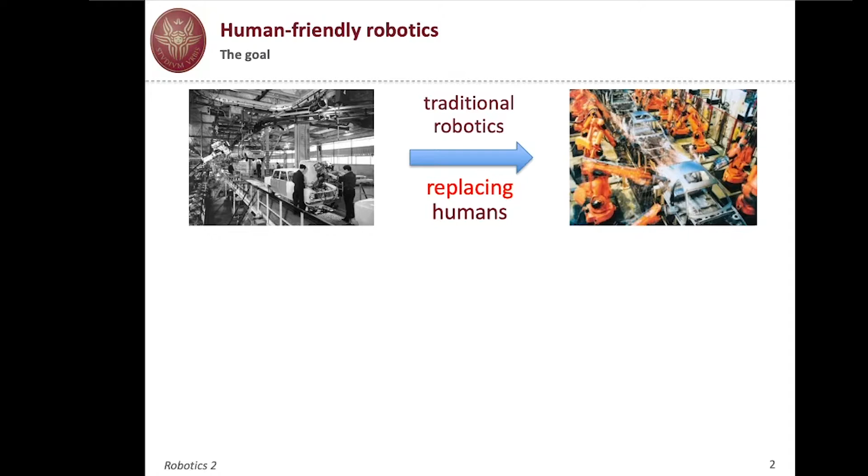I will start with a conventional point of view. The traditional robotics was one in which robots were replacing humans, typically on the factory floor. Now, for a few years, we've been talking about a new type of robotics, namely human-friendly robotics, where robots collaborate with humans, both on the factory floor, where they are called co-workers, working cooperatively with humans, or as personal robots in service applications at home, in hospitals, and so on. This means there is a planned proximity between humans and robots, both physical and cognitive, and we have to consider a number of things so that this may happen in a safe and consistent way.

The results I'm presenting are mostly research-oriented, developed over a number of years through European projects, first PHRIENDS, as I mentioned, and mainly the Saphari project, which we coordinated at Sapienza University of Rome between 2011 and 2015. As you can see from the partners and main topics, we tried to cover all aspects important in the interaction, in particular the physical interaction between humans and robots, covering the paramount aspect of safety, but also an intuitive way of communicating with robots.

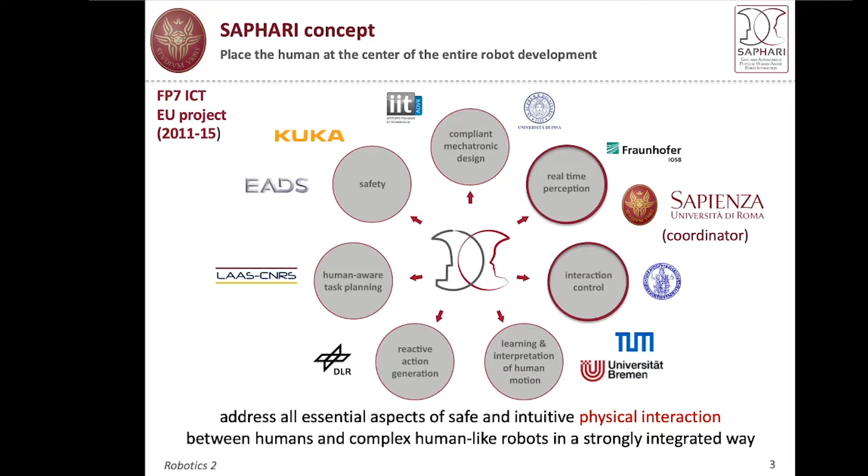In this lecture, I will cover essentially two topics: real-time perception, namely the use of sensors for monitoring the workspace in which the robot operates and understanding relative distance with other agents, particularly humans; and interaction control, in particular physical interaction control, the possibility of controlling and exchanging forces in a safe way between the robot and the human.

So in our plan of lecture, we have seen a first basic block of this hierarchy of behavior, and in all cases we formulate control problems which are strictly related to safety.

We have seen that we were able, without the use of external sensing, using only proprioceptive devices on board the robot, to detect and even isolate collisions, so unintended contacts between the human and the robot. We also saw a number of reactions mainly intended to abandon the area of contact, possibly continuing the robotic task in operation if this is safe enough.

Now, the next step, or if you wish, the previous step, would be to avoid this type of collision or unintended contact, which means we now need sensors for monitoring the workspace continuously and letting the robot react to vicinity, not just contact, which is the last moment of this interaction. So, avoiding collision while doing the task, or abandoning the task for a while and then resuming it as soon as the danger has passed.

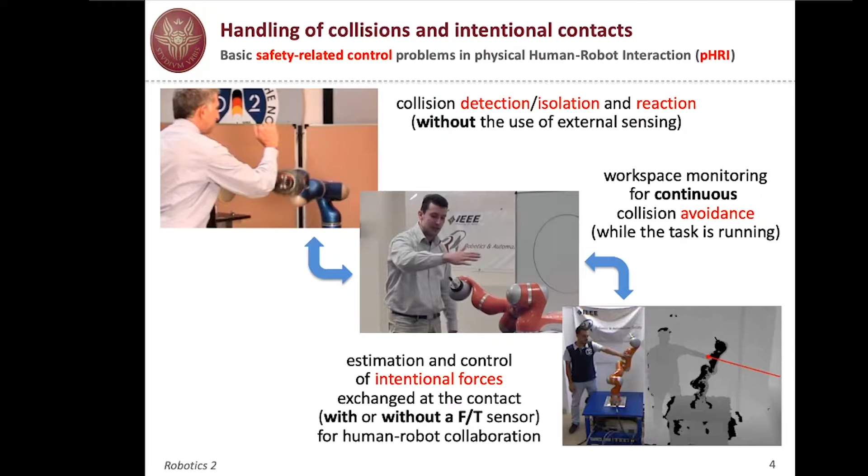So we have to estimate the forces at the contact. These are intentional forces being exchanged, and we may wish to use a force-torque sensor, or even proceed like in the first problem we saw, without using any other dedicated sensor. Of course, we may use whatever we developed for monitoring the workspace, so proximity sensing, together with signals generated in response to a collision, to detect a collision. We combine these two types of information in order to achieve the goal of physical human-robot collaboration.

A few years ago, we set up a control architecture that tried to capture all the robot behaviors relevant for this problem in a consistent way. The solution goes through an integrated design and combined use of several components, from hardware to software: soft mechanics meaning compliant, lightweight arms, actuation which may also be compliant and variable according to the task the robot does with the human, extensive use of proprioceptive and exteroceptive sensing, communication between robot and human or robot and robot, and everything orchestrated by control algorithms.

We decided that three levels were satisfactory to address the problem. The inner, or lower level, is safety. The second we call coexistence. And finally, collaboration. We will see now in detail each of these levels, what they are devoted to, and how they interact.

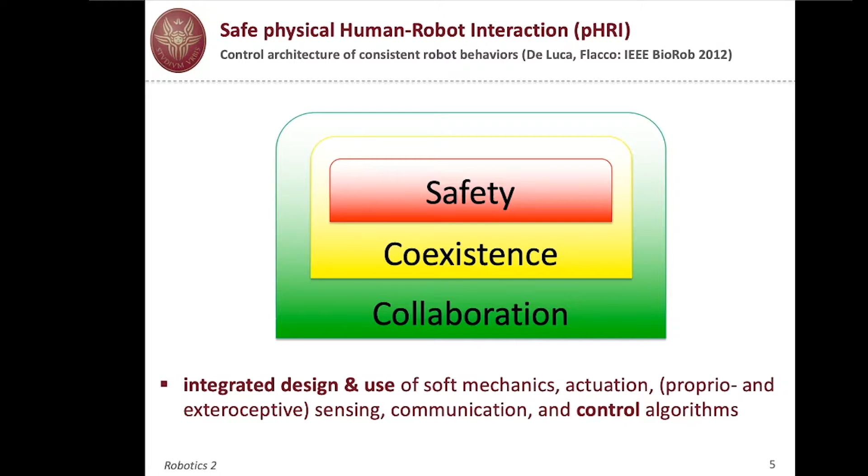First of all, the always active level is the safety level. This is the most important feature a robot should possess to work together with humans. The classical solution adopted on the factory floor was using cages, protecting the human from any movement and operation of the robot. So when the robot is in action, the human is not there. When the human is there for programming or maintaining the system, the robot is switched off. These are not appropriate solutions for physical human-robot interaction as we foresee it, so safety should be guaranteed in a different way.

One way is to use a collision detection method which is reliable, practical, and on board, like we have seen. Together with this, the design of lightweight arms, compliance at robot joints, and probably also some software parallel architecture that guarantees continuous operation even in the presence of failure. All this goes into the domain of safety.

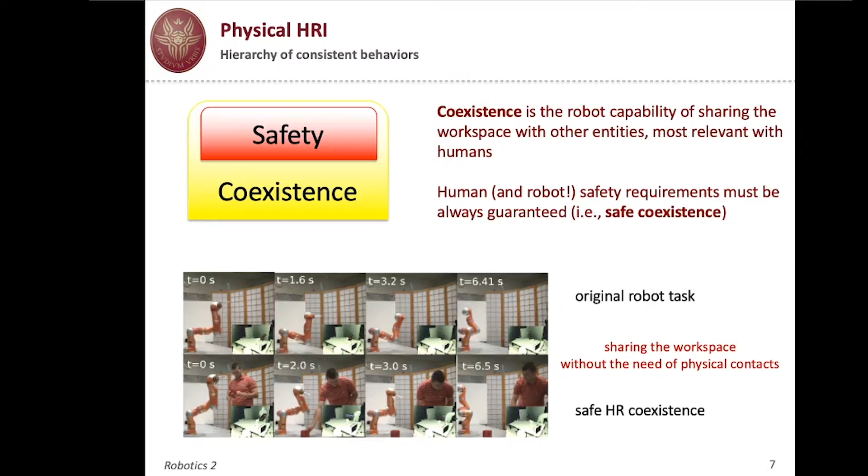This is the most complex task: collaboration. It's at the top of this hierarchy, and of course collaborating should be consistent with the other behaviors. Collaborating means having the robot and the human do typically complex tasks with interaction and coordination.

There could be contactless collaboration and physical collaboration. These two modalities are not mutually exclusive. By contactless, we mean, for instance, communication by gesture or voice command, or both, or even visual coordination - the robot following the human as the human does something, or the human showing something to the robot, and the robot replicating this type of behavior. There is no contact involved, but there is coordinated motion, so we call this also collaboration.

But in fact, we were more interested, particularly in the Saphari project, in physical collaboration, which involves intentional contact. So we should not avoid contact - we should recognize that human and robot should enter into contact and exchange forces, and of course this exchange of forces should be controlled.

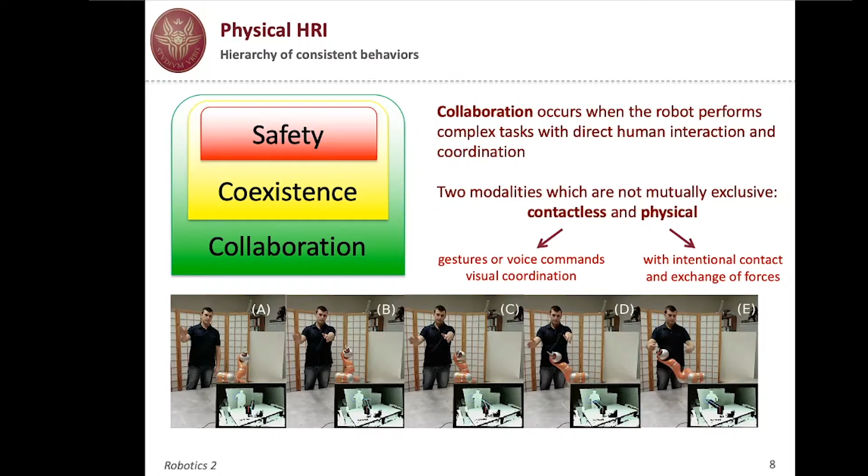Indeed, collaborative operations are also normed by standard. In particular, the standard ISO 10218, part 1, which concerns the single robot, and part 2, which concerns the robotic system as a whole, lately refined by a technical specification, the notation with the colon and the year. The year stands for the year of publication of the standard or of the technical specification, TS, which is not yet a standard. So the last one is of 2016, the 15066.

So in this context, there have been some effort in specifying what should be done, what can be done, what cannot be done, and classify the level of interaction, which are generically defined as collaborative operation, even if there's no physical collaboration in the sense that we have just mentioned.

So the simplest level, level 1, is the so-called safety-rated monitored stop. The human is entering in the vicinity of the robot, and the robot, through its external sensors - camera, lasers, proximity sensor, time of flight, whatever you name it - recognizes this proximity and stops. Now it doesn't stop in a catastrophic way, because this type of stop is already programmed so that the robot may resume its operation from that moment. It's not an alarm stop where you push the red button and then you have to restart the system.

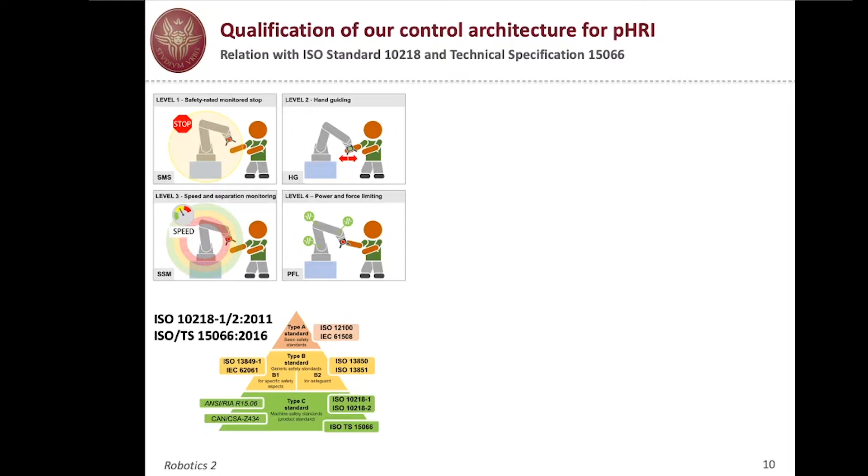If you look more carefully, on the right-hand side we have our 3 layers, and I single out some specific tasks assigned to each level. To safety, we mentioned collision detection and reaction. To coexistence, sharing the workspace, monitoring the workspace with extra sensors for the purpose of collision avoidance, and of course collaboration, coordinated motion and action with or without contact.

In the table on top, the brown table, you see that for each level there are specifications in the ISO standard about speed, about separation distance, about maximum torques, about controls that should be available to the operator, and how to reduce risk through analysis, assessment, and mitigation by special action.

You see that I've put some ellipses that relate the various levels to our architecture. Indeed, safety goes across all these 4 levels of collaboration. Our collaboration, physical or with coordination, is related to hand guidance, so level 2, or to power and force limitation, which is level 4, while coexistence involves level 1 and 3 - stopping or slowing down and possibly stopping, but still monitoring relative distance between the human and the robot. So we fit into this type of standard, although we developed our control methodologies rather independently from that.

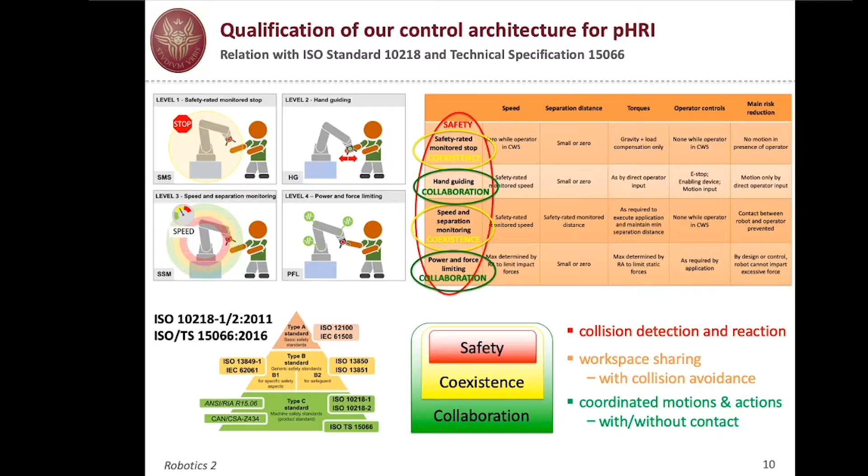Okay, so dealing with collision detection and isolation, we have defined a collision event pipeline. If we consider the problem of handling collision, we have this continuous cycle going on. We plan motion to prevent collisions, but because of the highly dynamic and unpredictable environment, because of the presence of humans, this plan may even fail. So we control the motion of the robot in real time to avoid contact, to escape from possible collisions.

If this is not achieved for a number of reasons, then we should detect that we have had a collision, isolate the link that collided, and possibly distinguish if this is a severe collision or not. Maybe if it's a soft collision, it could be an intentional contact that the human is searching, using the contact to provide some command, for instance the intention to collaborate. In any case, once we have classified the type of contact or collision, we react or replan motion - for instance, if the robot switches mode and is ready to collaborate from now on. This is a continuous cycle; you can restart, plan to prevent, and so on.

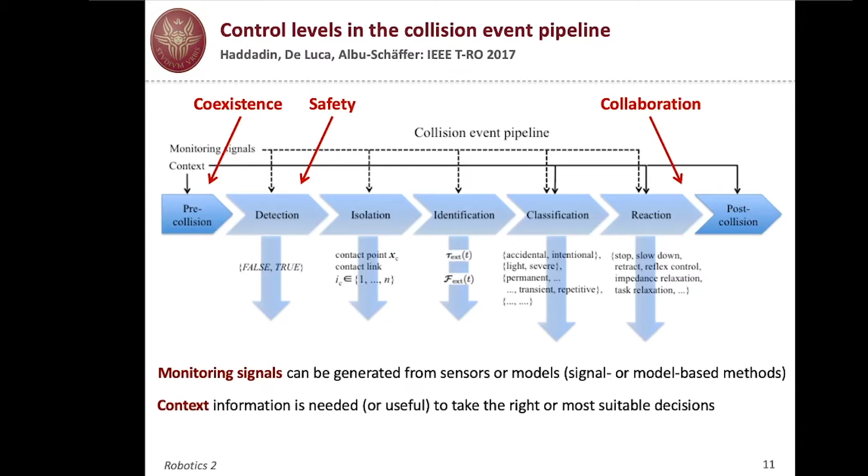Now, just to recall the safety part that we developed from the point of view of software: collision detection and reaction based on residuals, monitoring the total energy or the generalized momentum. This was mainly work done within the previous project, the PHRIENDS project, also financed by the European Community.

You can see that there are possible reactions, the reflex reaction, generating torques which amplify the residual from the collision so that the robot flies away from the area. The admittance mode was commanding the motion in the joint space proportionally to the amplitude of the residual, and the residual goes to zero as soon as the contact is lost. So you see that the reaction in admittance mode is more stiff in a sense, as opposed to the smooth behavior with the reflex torque.

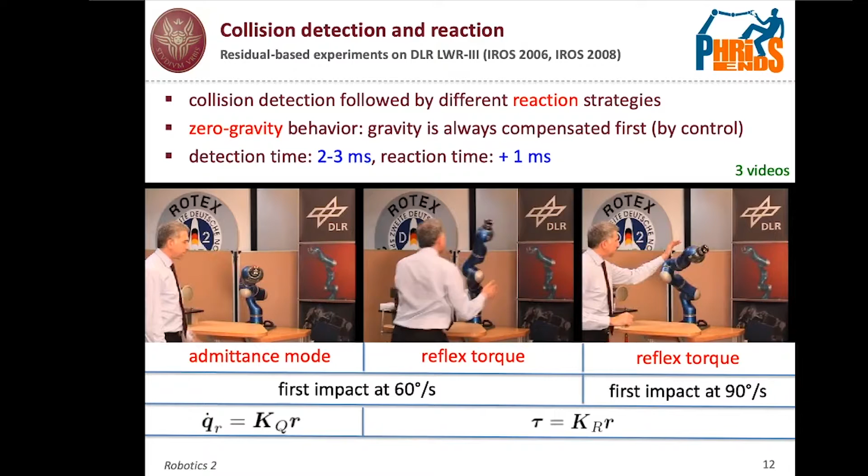Okay, so this is done in a sense. This belongs to the layer of safety. So from now on, we will move to the second layer and then the third layer of collaboration. My presentation will develop the two layers one after the other.

At this point, I would like to show you a couple of videos that tell us the story. The early days, this is an informational video developed by the National Institute for Occupational Safety and Health of the USA in 1989. And then one video coming about 23 years later, a commercial video by ABB. It's just an extract from a longer video which presents some hardware, the electronic position switch that allows the robot to stop when something goes wrong, and also the software, the Safe Move software, which implements some of the ideas presented also in the safety standard ISO 10218.

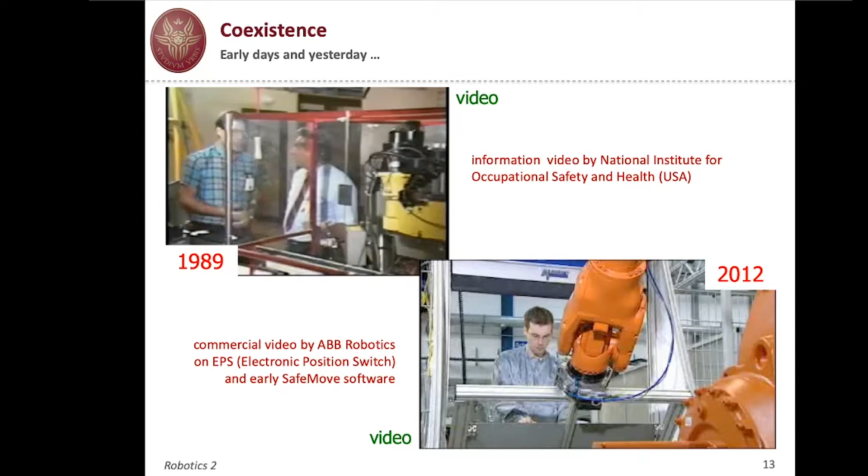Robots have brought about more productive manufacturing lines and greater quality assurance. Their use has saved people from having to work in hot, toxic, or otherwise dangerous environments. Automated production lines using robots are chalking up an admirable safety record. However, industrial robots have injured people, and injuries may occur more frequently as the number of working robots increases. In at least one case in 1984, a worker was killed. The victim entered the working range of the robot, presumably to clean up scrap metal that had accumulated on the floor. The work cell control systems did not sense his presence, and as a result, the worker was pinned between the back end of the robot and a steel safety pole. His heart stopped. No matter how automated a manufacturing line is, there are sure to be workers around who must be protected: line operators, maintenance workers, programmers, managers and visitors. Robots have weak sensing capabilities, so they can't be relied upon to always react in a safe way when these workers approach. Safeguarding robots is more complex than safeguarding other types of machines. Their range of movement is much greater than other machines. Machine guards around belts, other moving parts, and points of operation are small in comparison to robotic work cells that often encompass several cubic yards on the plant floor. Robot guarding has to be flexible too, to adapt to the variety of tasks a single robot may perform.

As you have heard, there was a big concern about the potential for injuries and incidents on the factory floor. One reason for that was that the robots had low sensing capabilities. This has, of course, dramatically changed since then, but it's important to understand where we were coming from.

Now, the next video, as I said, is 23 years later, and we'll show some commercial products by ABB Robotics.

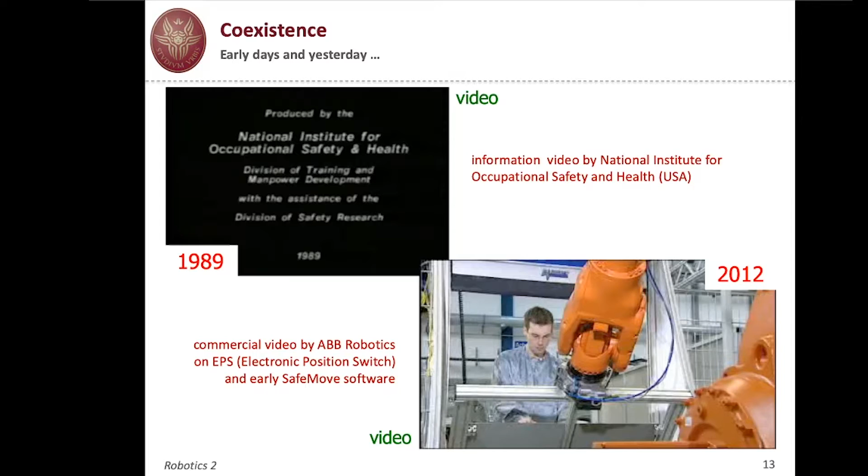With the function EPS, electronic position switch, the conventional limit switches used to restrict the working range of the robot are fully replaced by a software function. If, for example, due to a programming error, the robot attempts to access a forbidden zone, it will be switched off by the safety controller.

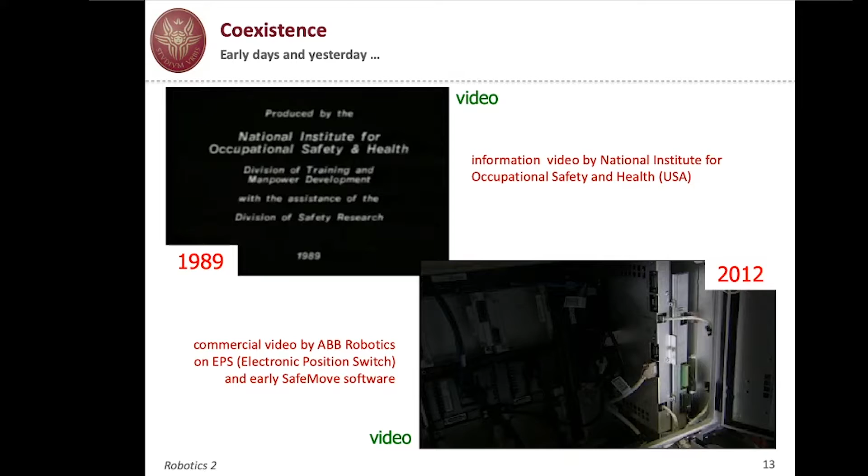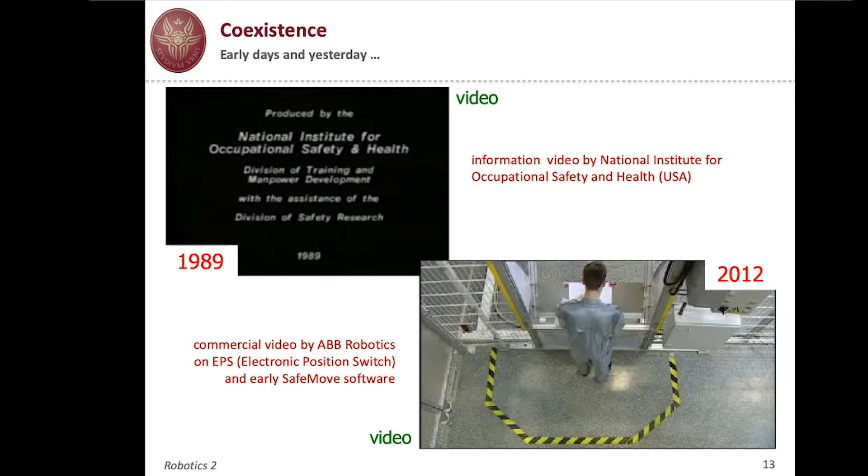The interaction between a worker and a robot, such as for manually loading a gripper with a workpiece, becomes possible with the Safe Move function. With Safe Move, the safety controller supervises the safe standstill of the robot during the time the worker is within the hazardous zone.

Furthermore, Safe Move allows limiting the robot movement to predefined zones in space in order to enable safe coexistence of human and robot. It also allows restricting the traveling velocity of the robot to a preset value.

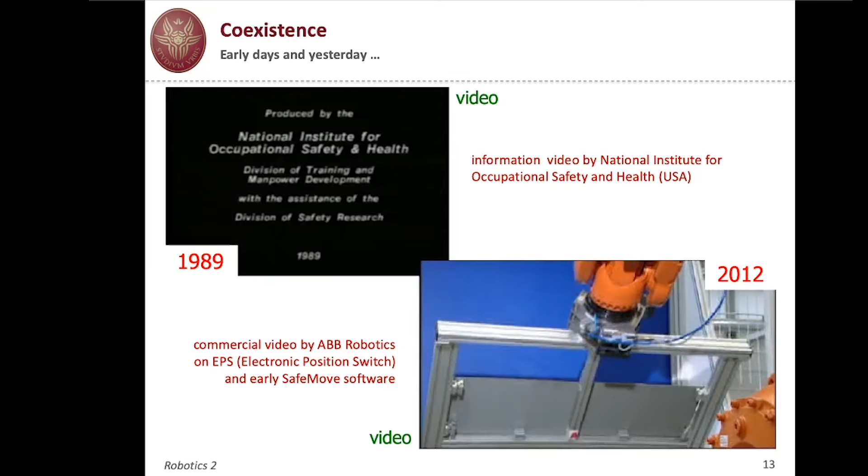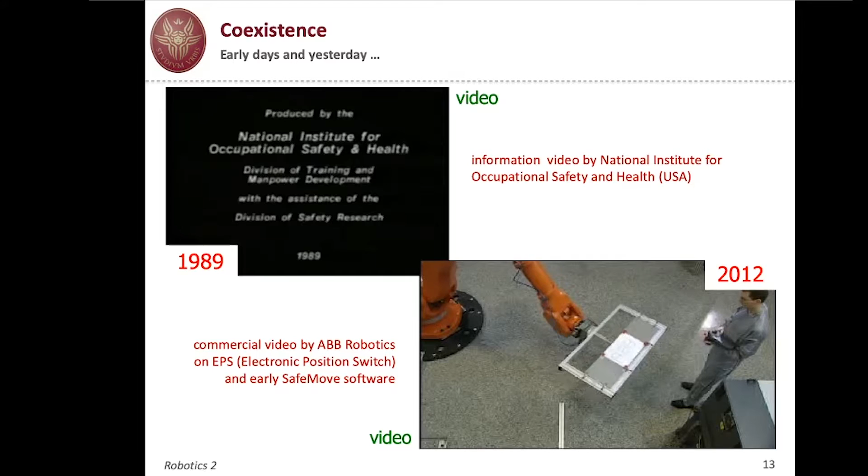To enable humans and robots to optimally complement one another while carrying out manufacturing tasks together, it is necessary that the position of the worker is spatially detected in a safe manner at all times. In principle, this can be achieved, for example, through camera systems which constantly monitor the workspace of the robot and the position of the worker, and continuously transmit this information to the control system.

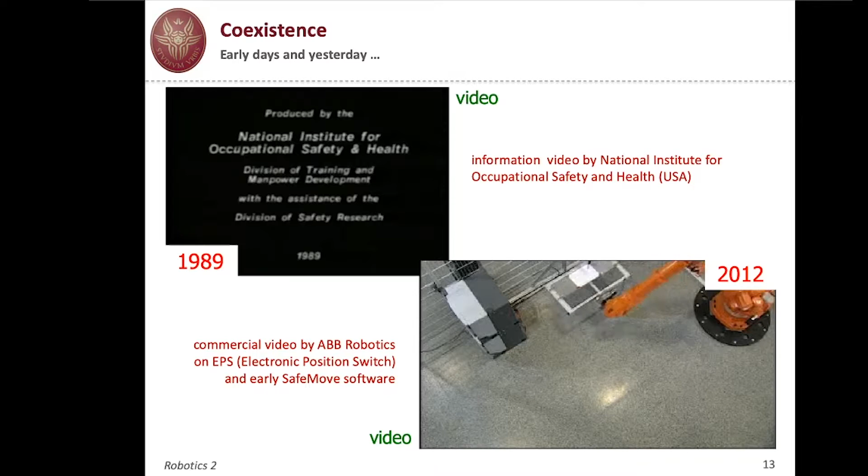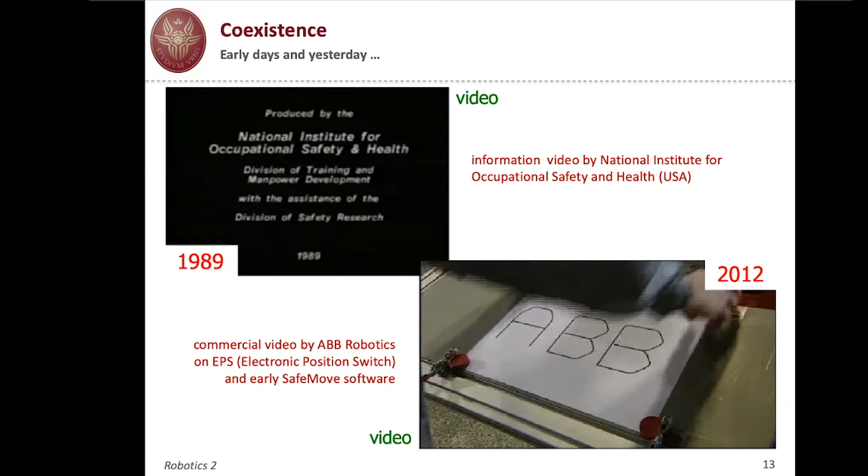If robot and human approach one another, the control system can first reduce the velocity of the robot until it finally switches the robot off completely, in case the distance between worker and robot falls below a preset distance. This method allows safe implementation of new semi-automated manufacturing strategies that were not possible up to now.

So, as you have heard, about 8 years ago, in the manufacturing area of ABB, they started developing this SafeMove software. Things have progressed since then, but you may have recognized the speaker mentioned a couple of aspects.

So, slowing down motion, stopping the motion—everything is controlled by monitoring of the workspace. In particular, they were using a laser scanner in this context. You saw a laser scanner in front of the window, which was open when the human brought in a part and wrote the logo of ABB, and on a table supported by the robot. In all other operations, there is always a camera, laser, or proximity sensor monitoring distances.

So things have developed, and in fact, in 2016, ABB issued SafeMove2, which is certified. This is a demo from an exposition in Singapore in November 2016, which is simpler than the one we've seen before. There is no audio, so I can run it right now. This is, I would say, today's operation.

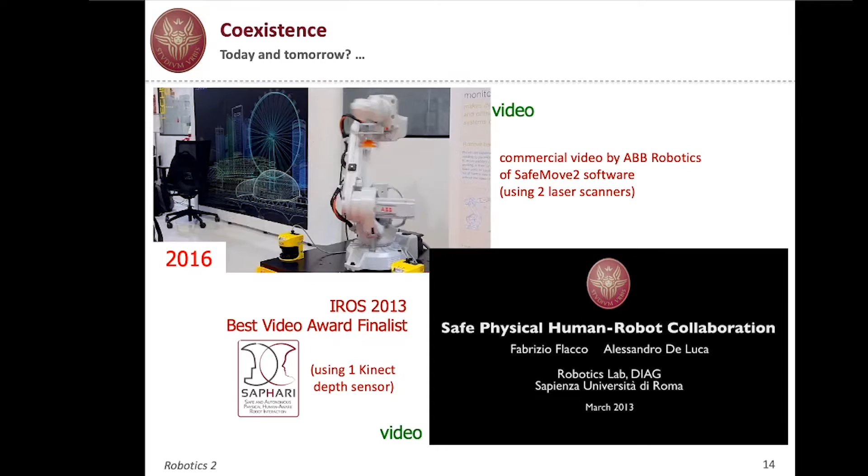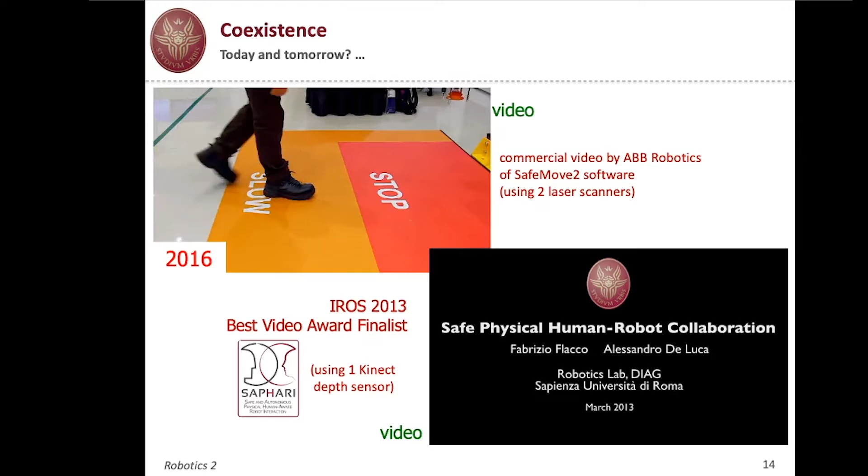So this is an ABB robot, it's white, not orange. This, just for representation, shows the areas being monitored. You see at the base of the robot there are two laser scanners, the yellow boxes, right and left. When the human enters the slow area, it reduces its own motion. When it enters the stop area, for instance to inspect the end effector content, the robot stops completely. Then it restarts because you're in the slow area, and when you're out of this, it's completely off.

Okay, so around the same time, in SAPHARI and previously in PHRIENDS, we developed our architecture. We have here a summarizing video, about 3 minutes long, again with audio. I will stay quiet for these 3 minutes, which shows our concept.

You will see that our concept, especially for testing distances between the human and the robot, is much more flexible. It allows the human to get much closer, still under safety conditions, to the robot. There's a difference because here we use a lightweight robot by KUKA, not an industrial one, but apart from that, the operating conditions are quite similar.

In the video by ABB, they were using two laser scanners. Here we are using just one Kinect depth sensor, which is, by the way, a very cheap one. But our solution has not yet been certified by the institutions devoted to this, so it cannot be moved directly into an industrial setting without that certification. This may be done eventually—it's not something we're particularly interested in doing ourselves, but there are some transfer activities of this type. So, the next video is 'Safe Physical Human Robot Collaboration,' and it dates from 2013.

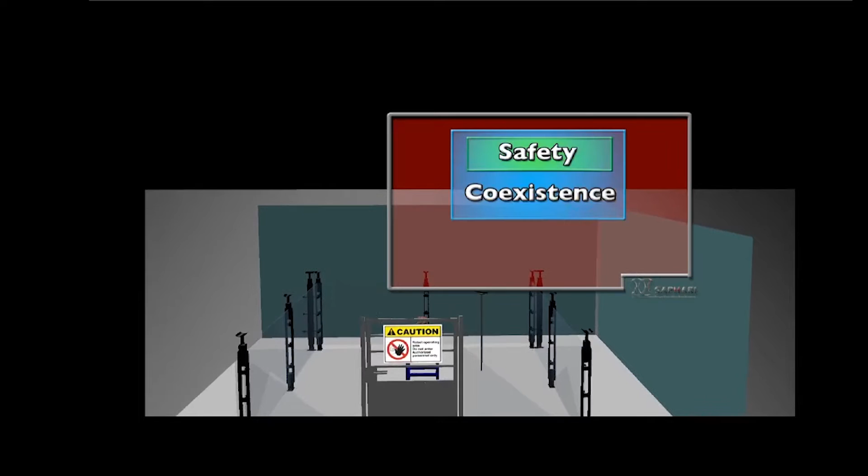Safety is the most important feature for robots working close to humans. Coexistence is the robot capability of sharing its workspace with other entities. Collaboration occurs when the robot performs a complex task with direct human interaction and coordination.

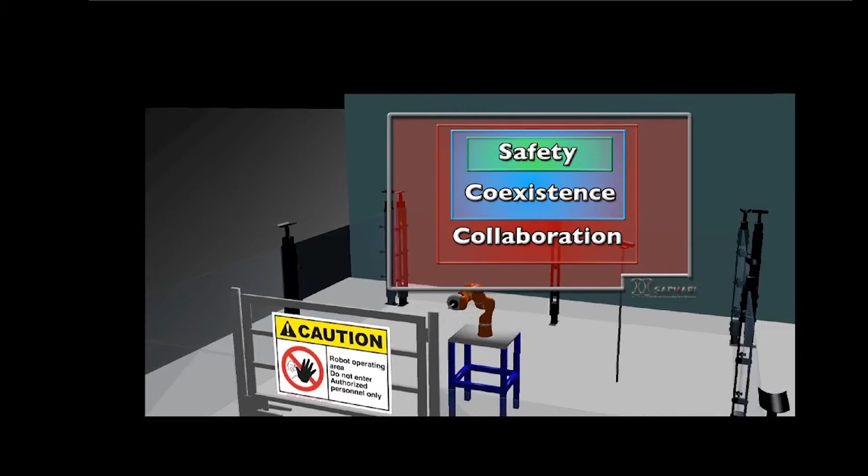Safety is guaranteed by a collision avoidance method based on a depth sensor, the Kinect. Points of interest on the robot are projected in the depth image, where robot-to-obstacle distances are computed in a fast way, taking into account also obstacle occlusions. Collision avoidance is performed in real time.

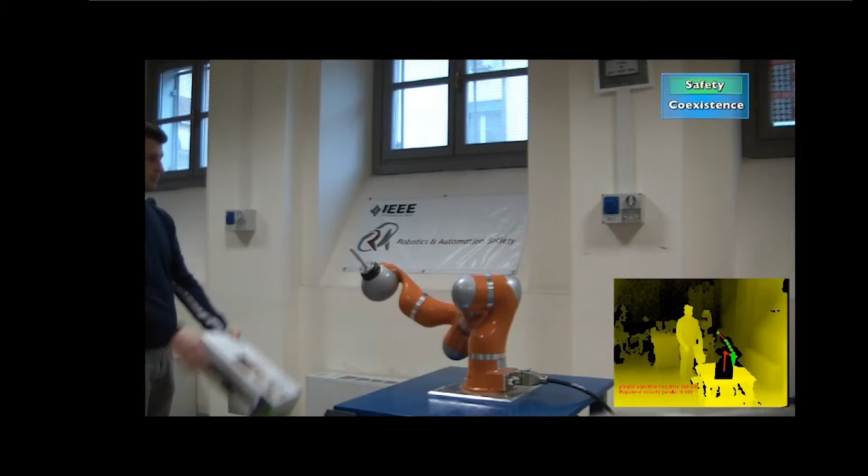Besides tracking the human pose, also static or moving obstacles are detected, tracked, and avoided. Multiple obstacles are avoided as well. Except for the end effector, all other robot points of interest will treat obstacles as geometric constraints in Cartesian space.

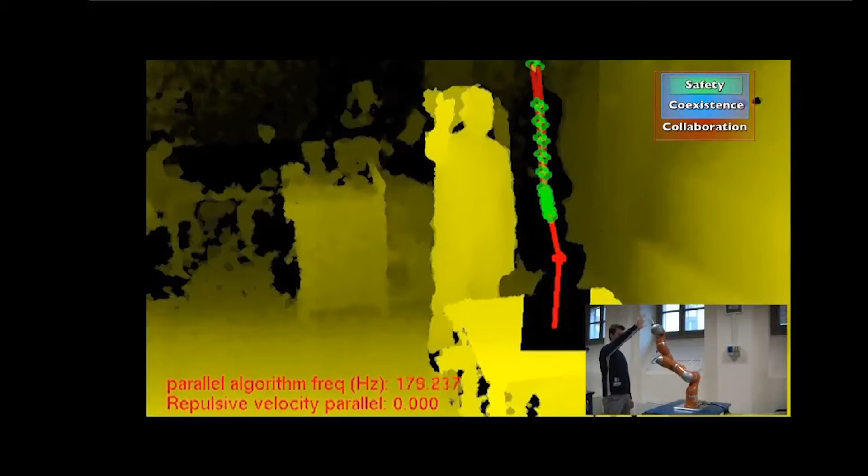A collaboration phase is started by the user with a simple gesture. Contact points are localized using the depth sensor. This geometric information is collected together with the joint torques resulting from the contact, as obtained by our residual-based estimator. Combining this data allows an estimation of the exchanged forces at the contact point, those used by the human for guiding the robot.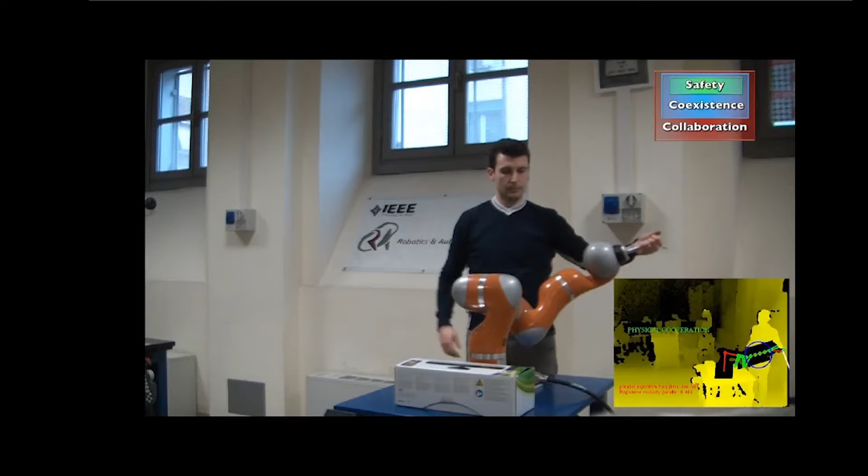The user requests to end the collaboration phase by pushing on the robot end effector. Safe coexistence is guaranteed: only the designated collaborating hand is allowed to get in contact with the robot end effector. All other entities are still considered as obstacles.

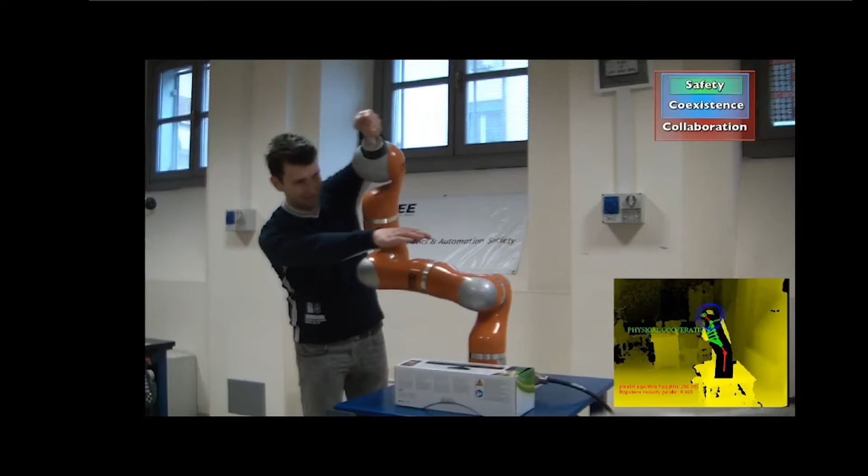Robots and humans for a safe physical collaboration. More results on safe physical collaboration tasks are underway within the Saphari project. Stay tuned.

Okay, so apart from the music, which is horrible but was free, you have seen all the development that we have made, in particular by measuring distances between the robot and the human. We use a depth space approach, and now I will show you how this works, which allows us to get very close to the human, in fact, between the human and the robot, before stopping the robot or moving it away.

The second part instead is more devoted to collaboration. This was our first attempt to do collaboration only at the end effector level. And you have seen what I called consistency between collaboration and coexistence.

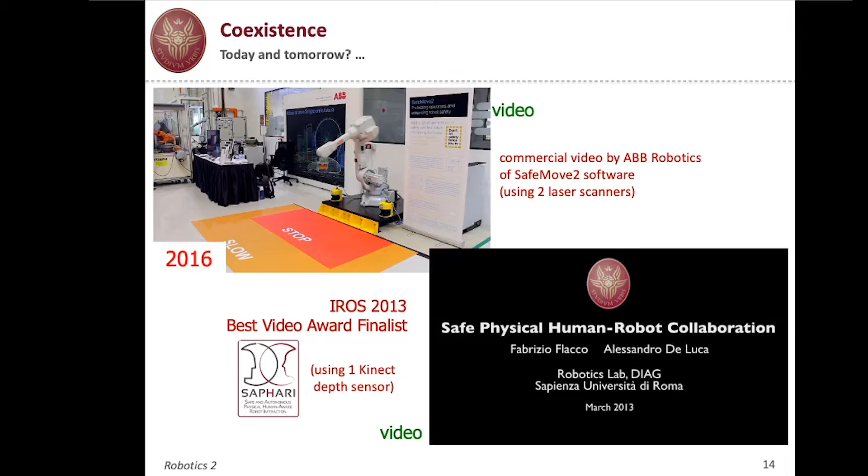At some point, Fabrizio Flacco, the person in the video, is holding the end effector and moving it against his other arm. Because collaboration was in action, the robot was following the human hand at the end effector level. But since coexistence is more important for the other part, trying to bring the robot against his other arm made the robot very stiff, so that Fabrizio could not really bring it into contact. So at this stage, you have a safe collaboration or a coexisting collaboration, because the two levels have interacted in this way. Okay, so let's move on and consider the problem of collision avoidance.

Of course, we need to have an exteroceptive sensor monitoring the workspace, and there could be a large variety of sensors. In fact, for instance, laser scanners were used mostly for navigation in robotics. Now the main target is to provide information on human-to-robot distances in safety cells. You can have stereo vision, single camera, multiple cameras, Kinect depth sensors.

Presence sensor, or structured light. So you can combine a variety of sensors, also of different cost indeed.

One main problem is where to put the sensor around the cell. You should try to minimize areas which are not covered by any sensor. You don't want to use a large number of them, so you have an optimization problem, which takes into account also the probability that the human will stay in some area around the robot. For instance, if most of the time the human will be in front of the robot and not on its back, then it is clear that our sensor will be more pointing to this area rather than the other.

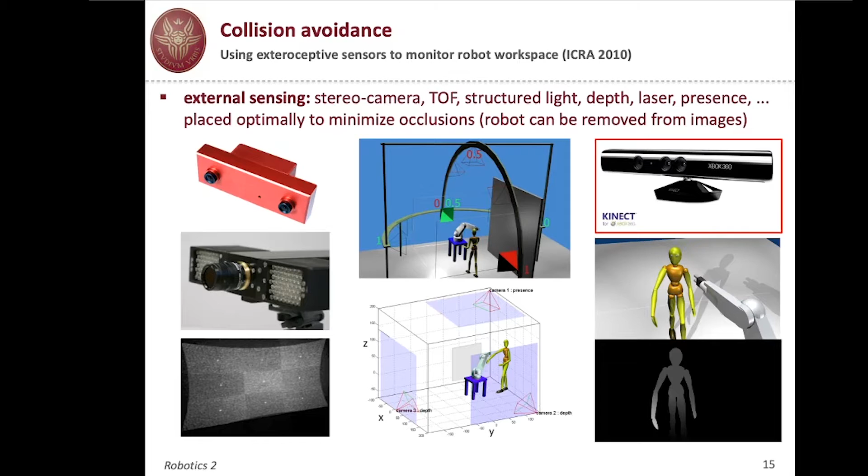So we decided to use the depth information. Depth information is coming from so-called RGBD sensors, so cameras which are equipped also with an extra laser information, which allows us to reconstruct the depth and associate to each pixel of the image also a depth of the object being seen. So in this typical image in yellow and black, the lighter the color of a pixel, the closer is the object. Objects which are far away are pretty much dark.

Once you have collected this image, how do you use it to understand relative distances between a moving robot and objects in the environment, which may be either static or moving like a human? There have been over the years a number of approaches working in the configuration space of the robot, which is the typical motion planning space that is being used. We just need to compute distance very quick, very fast, and very reliable.

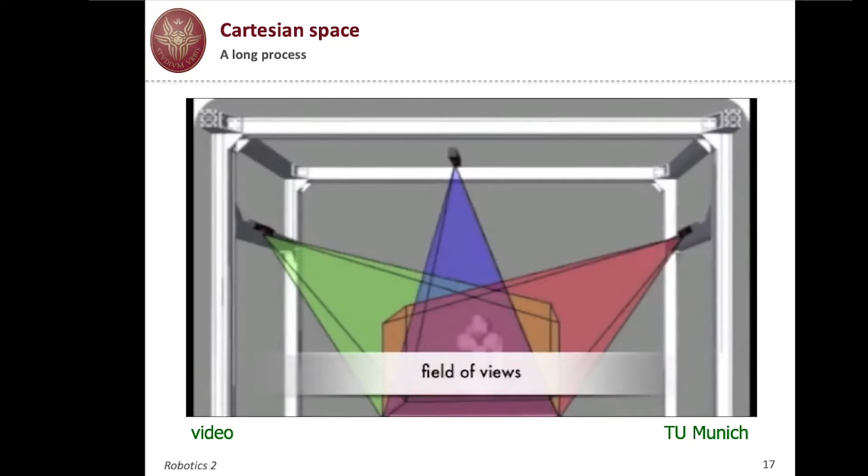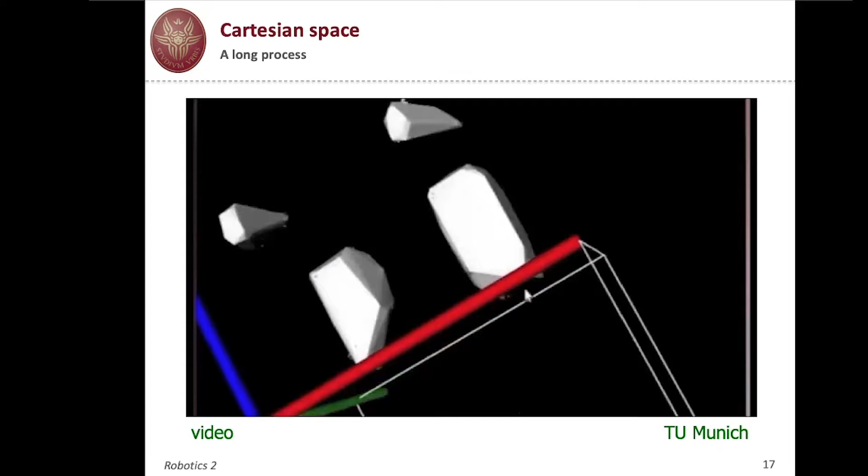Here we have a video developed at the Technical University of Munich, which describes the use of camera or depth sensors with multiple fields of view and reconstruction in the Cartesian space of objects. You see the human hand being mapped, and associated to this, you build a geometric object which will be used for making computation. But indeed, you are reconstructing all the objects in the 3D space. Here is how it works.

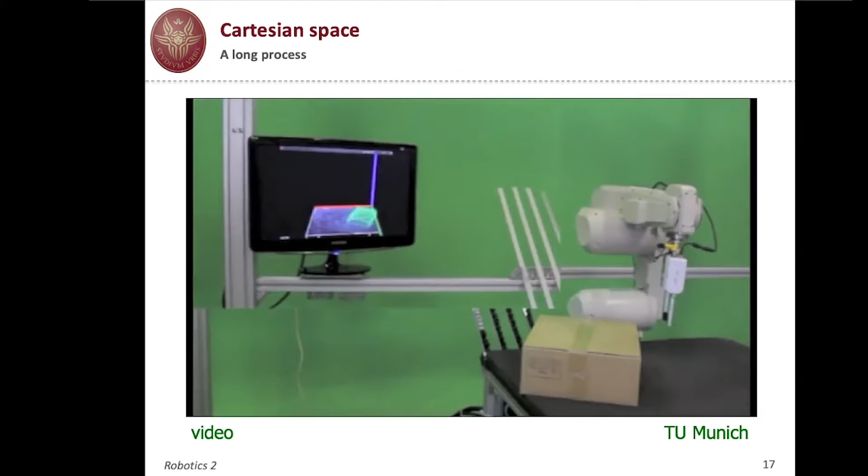You see on the left the image. One very important thing is that the robot is being removed from the picture. Otherwise it would be considered an obstacle itself, and it would always auto-collide in the sense that it would be closest to its own body, so there would be a dangerous situation. So this object, this robot, is removed from the image. All the other objects are being perceived by the sensing devices.

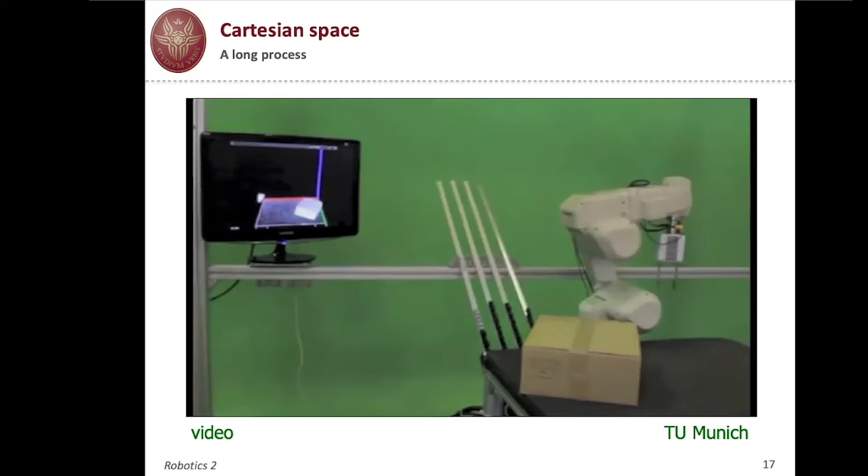Indeed, there will be some gray area. You cluster obstacles, but at the end you'd like to reconstruct the 3D object in the Cartesian space. And from there on, you can plan motion or react to motion.

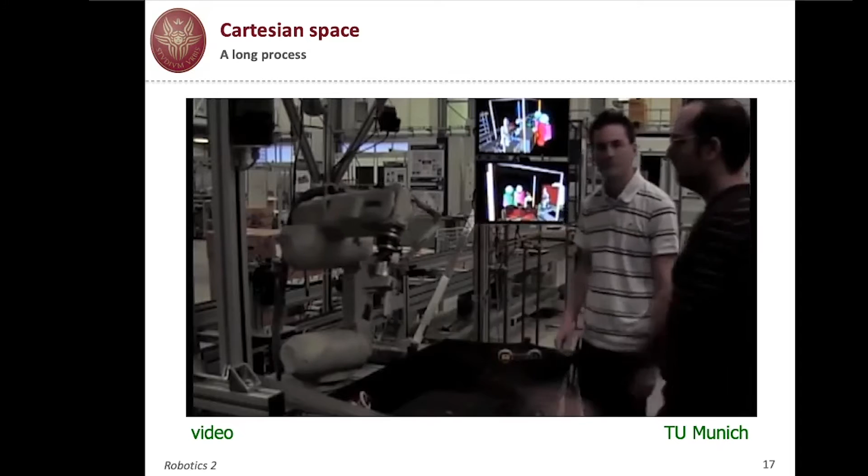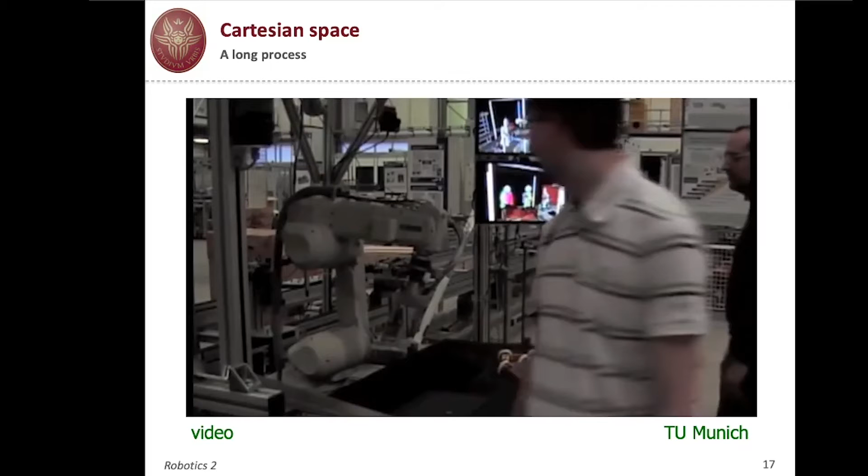Here is a demo with the Kinect overlooking the scene, and you see in the back the reconstruction of the 3D environment of human puppets, I would say. And of course, the robot who's not moving will retract as soon as you get close to it. So this was an approach that was pursued for a while, but then outperformed by other methods.

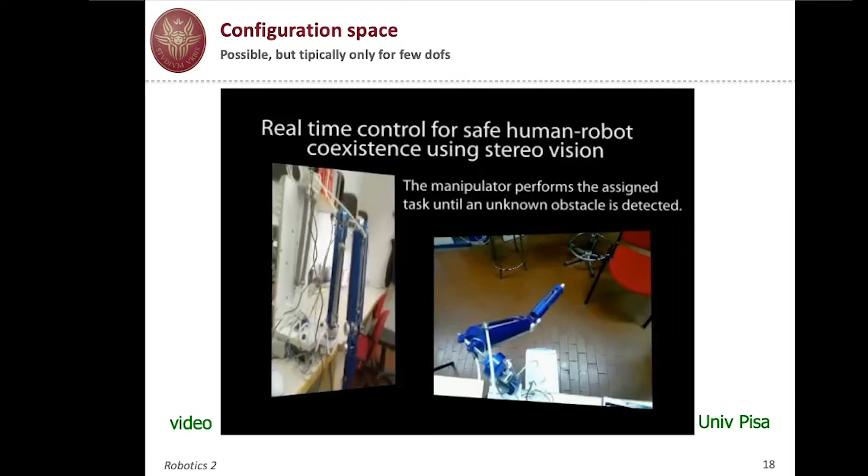Now, configuration space is the more traditional way. This is a very old video developed at the University of Pisa, and is typically applied only if you have very few degrees of freedom. Here you have a stereo camera, you can see it on the left, overlooking the motion of this soft arm.

This describes visually the operations that are being done in order to construct a representation of the obstacle, a human arm here, and of the robot in the configuration space. So there's a matching of features, and from there you can build a depth map from the stereo image, so that at this point you have information about all the objects present in the field of view of the camera.

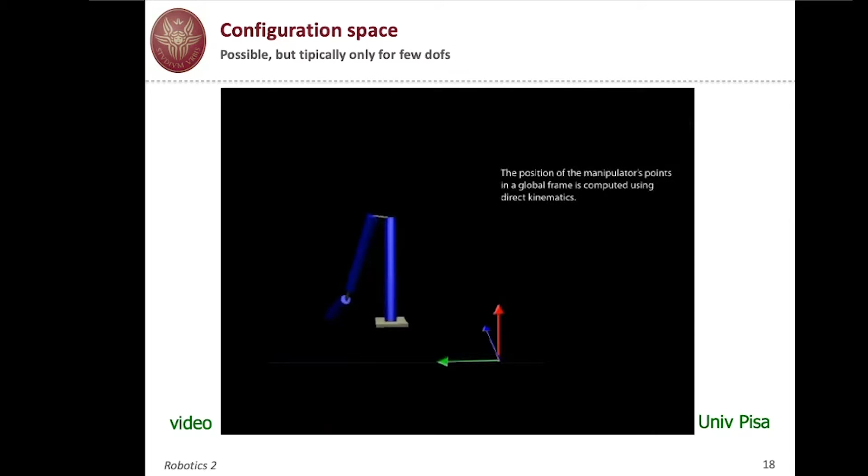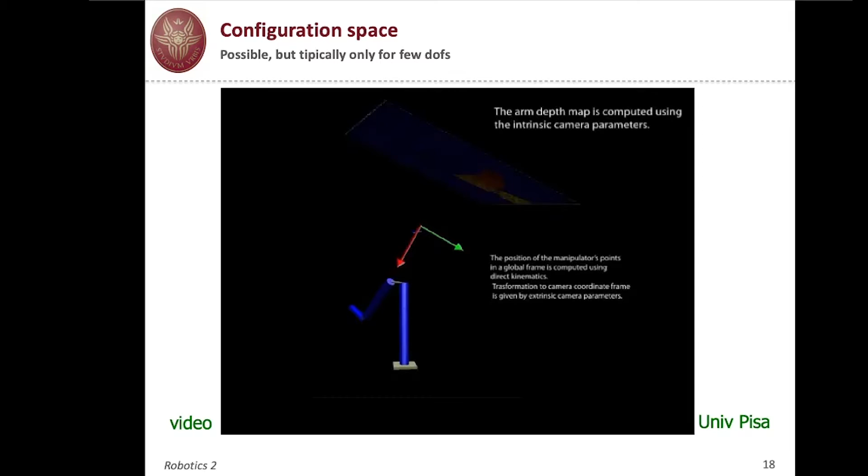Now, when you move the robot, you know at every time which is its configuration. You have a geometric CAD model of the robot, so you can compute what part of the configuration space is being covered. And now finally, you construct the so-called C-obstacle, the image of the obstacle in the C-space. In the C-space, the robot becomes just a point, and you can plan a path which avoids collision.

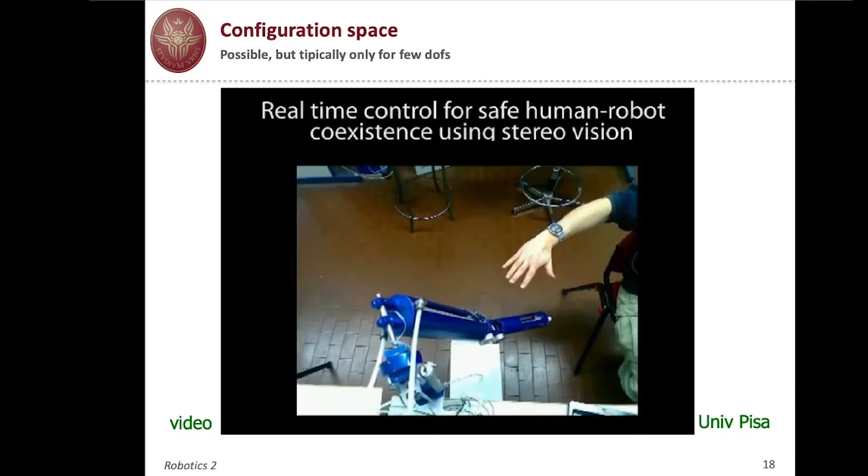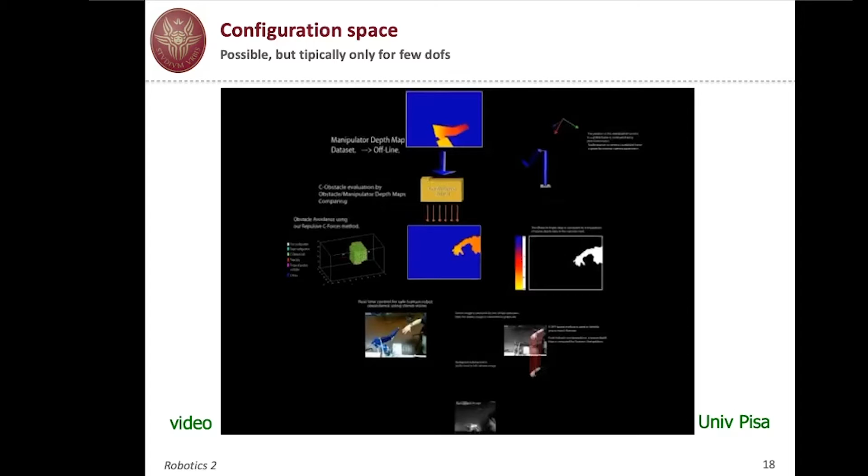You can see it in green in this 3D view. Of course, this can be visualized if you have 3 degrees of freedom, so a 3-dimensional configuration space. For higher dimensions, things can be done, but it becomes computationally very intensive and not visualizable. Here you see the final result: the robot getting around the obstacle. Of course, this is being done in real time, but you have seen the whole process detailed in this video.

And finally, the depth space. We adopted this one because it is very convenient, very fast, and very reliable. The depth space is a so-called 2.5 dimensional space because it lives on the image plane. Each pixel in the image plane is associated to points along a ray which passes through the optical center of the lens.

There's a third piece of information, which is the depth of the point with respect to the image plane. So along each ray, you can tell how that Cartesian point projects into one pixel of the image, and what is its distance from the image plane.

So if you have a Cartesian point in a reference frame with some coordinate, you have to transform it into the coordinate frame of the sensor, which has a z-axis along the focal axis of the camera. You can give the coordinate of this point in depth space by associating the 2 points px and py on the image plane with the depth, which is the extra information provided by the depth sensor. So it is, in fact, almost 3D information, but it's associated to each pixel of the image.

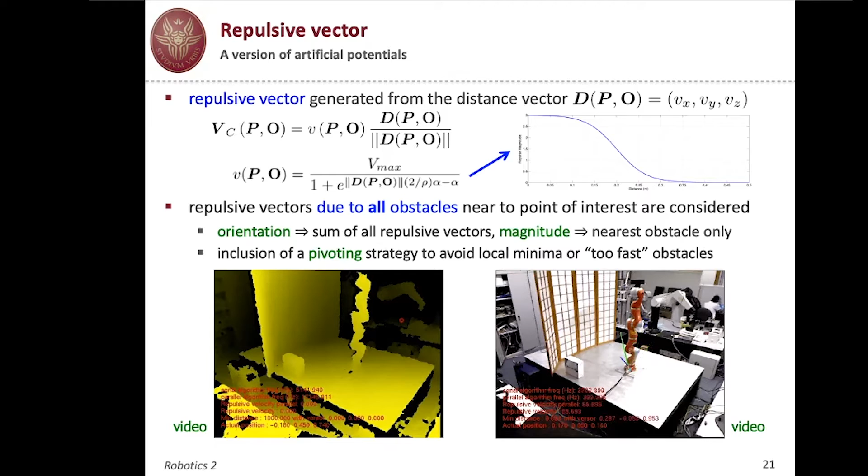Now this is obstacles moving around a fixed point of interest. This fixed point of interest is placed outside the robot, but in general it's one of the points of the robot and moves together with the robot. The second video shows instead the point of interest moving, still not on the robot. You see it's getting closer to the table, and you see the repulsion, both the intensity and the direction, and now it's moving around and getting closer to the robot itself, so feeling points of the robot as being obstacles.

So now you're moving this point in the depth space. You're moving the point in the Cartesian space, but this is the view from the depth space, and the computations, as I said, are made all in the depth space, so we are representing it also in the depth space.

Now it's getting down to the table. It will feel some surface first, move close to an obstacle placed on the table, and this is the view on the table, and so on. So this is just qualitative, of course you don't have numbers here, but just to support the idea that this mixed combination is in fact very effective.

There are situations where just repulsion is not enough, especially if the obstacle, now represented by a disk, a red disk, moves faster and against one of the points of interest, one of the control points of the robot. So what happens? If you just go away in the direction of the minimum distance, the following situation will occur: the obstacle, which is faster, will hit the point of interest.

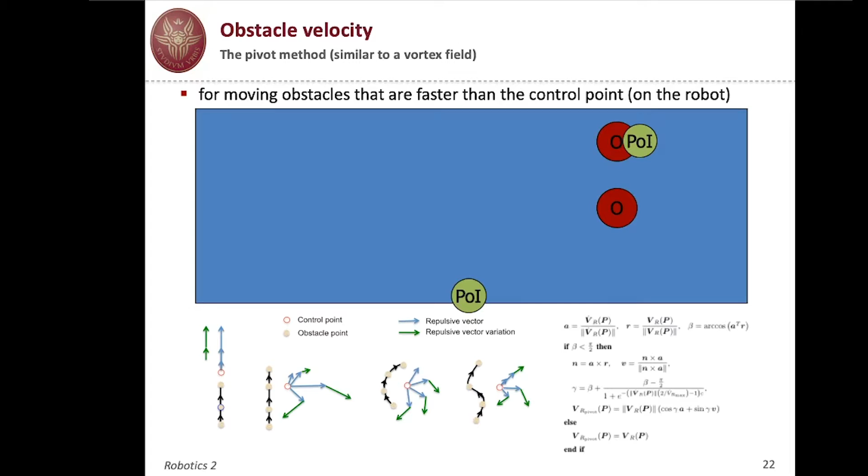And here, if you're interested, I also reported a very short code doing this pivoting operation. I will leave this for your reading afterwards.

We have considered one control point, one point of interest at a time, but in fact we will handle differently the end effector, which is more relevant and to which we have assigned a given task velocity. In this case, we add the repulsive velocity directly to the original task velocity, so we modify the task.

In this case, the repulsive vector will be considered as a Cartesian constraint, so you cannot go in a certain direction. Actually, you should go in the other direction. It's like having a geometric obstacle that prevents you from going in a certain direction.

This constraint is then mapped into a modification of the limits, the joint range and the joint velocity limits, within the algorithm that we have seen already when dealing with redundancy, because here we are typically in a redundant situation. Using the SNS algorithm, the saturation in the null space, we have hard constraints at the joint level, and one of these hard constraints comes from the repulsive vector in the Cartesian space.

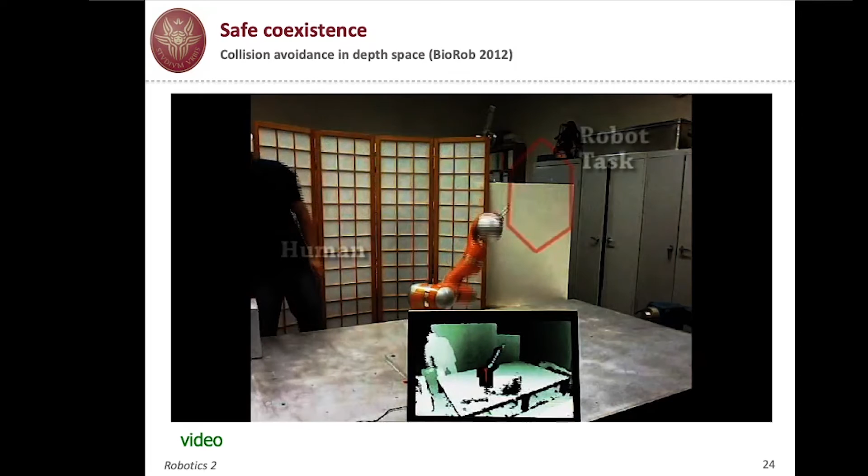Let's look at the operation. This was in fact one of the first videos performing this type of coexistence in a safe manner. So the robot is doing some task, for instance the classical hexagon that we have used over and over to represent some generic operation.

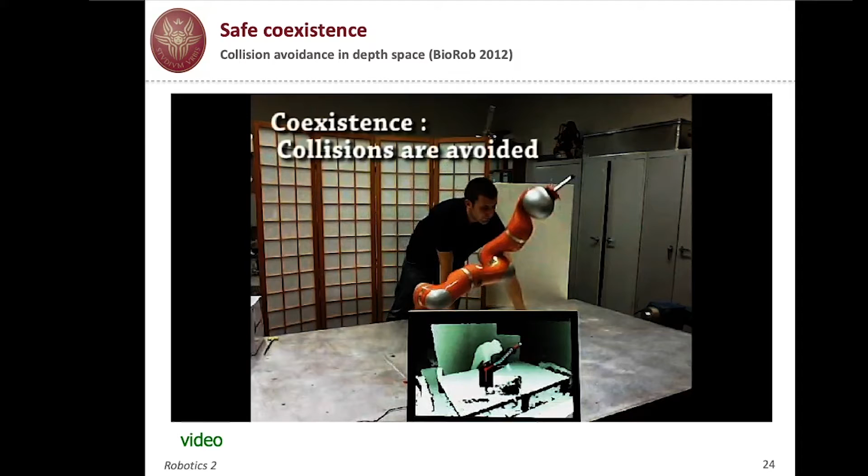And now the human interferes with the original task. So the robot escapes at the end effector level now, and of course not only for human parts, but whatever obstacle is being sensed. You can see below the depth image and the computation of the distances and of the reaction.

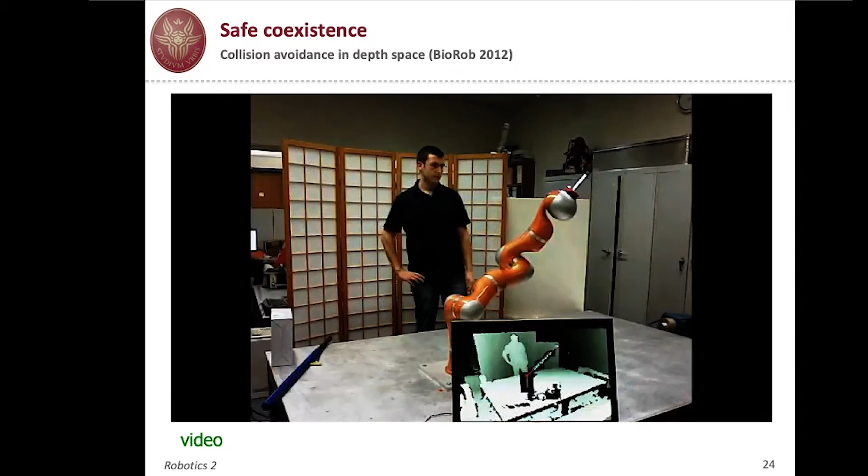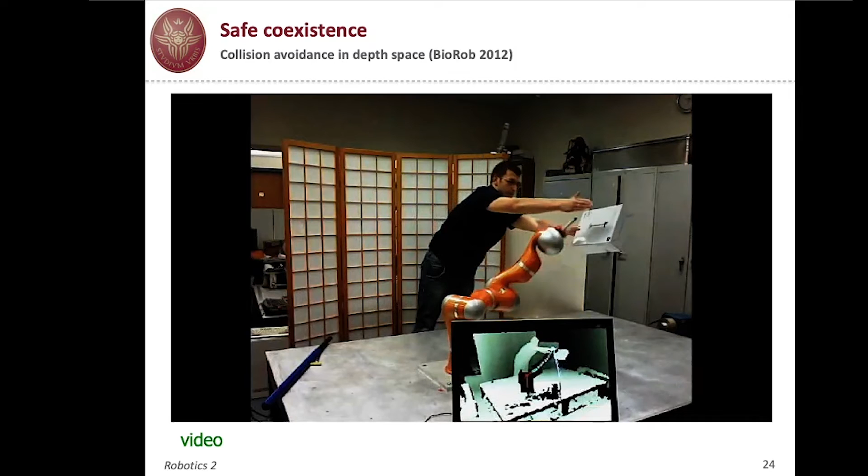And here is a classical pivoting operation when you have multiple obstacles, and the robot escapes by pivoting around the center.

And now you're considering the whole body. In fact, you can see that there are several control points in the depth image, and so you can avoid collision in this way.

Indeed, if a collision occurs, the residual that we have built for this robot, the signal generated in real time while moving the robot itself, will jump out of zero, detecting a collision and possibly also which link collided, and either stopping the robot or reacting to the collision by abandoning the zone of contact as soon as possible, like in the floating or reflex reaction that we have seen before.

This is the same experiment repeated in our lab, and then developed over the years.

Here there's a parallel simulation in MATLAB while the robot is running, so you can see the actual operation of the robot and the avoidance. You also have the video showing the depth image and the computation of distance and repulsive vector.

But on the MATLAB 3D plots on the left-hand side, you see a skeleton representing the robot, and you also see how the robot is executing its task, abandoning its task, again an hexagon in the Cartesian space, and then resuming it as soon as possible.

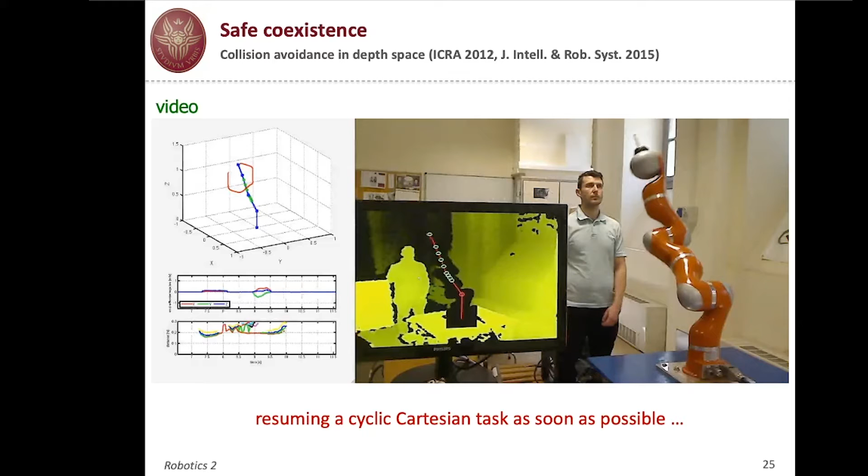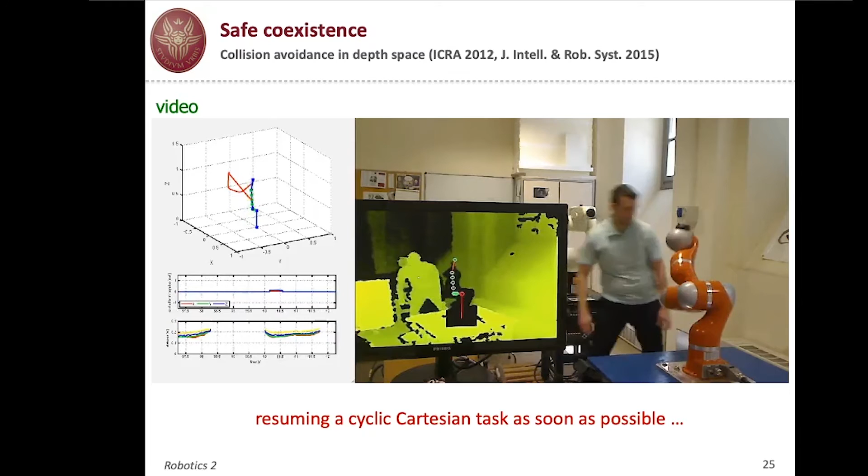So you see that large avoidance, and now the end effector is going back to the hexagon. And now with multiple obstacles, escaping, abandoning the hexagon, but then resuming it, and so on. So the main difference is this, and below you see the computation of the minimum distances from any object to the various control points on the robot.

Okay, all this was obtained using a single Kinect. Indeed, there are some limitations. So the idea is you can put more sensors, in particular more Kinects. Now Kinect, even version 2, is out of the market, but there are alternative similar systems. At that time, a Kinect cost less than 100 euros, so it was a very cheap sensor. So you can equip the workspace with more than a Kinect.

In particular with two Kinects, in order to solve the classical problem. The first problem is that there could be false collisions, because if you're obscuring the view of the Kinect of the robot, this is considered a close obstacle, so its depth is associated to the depth of the control point. So it's as if this obstacle is very close to the robot, while in fact it is still far away. If you mount a second camera, and of course you have to calibrate the two systems with respect to each other, then you can recognize that this situation is no longer true. So this is the first problem that you solve.

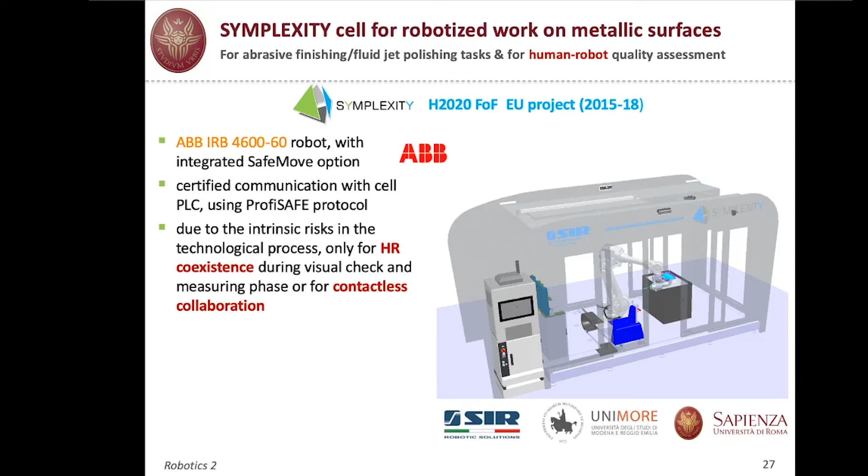And there's another possibility of contactless collaboration. We implemented a gesture-based communication, a very simple one. In order to do this, we mounted two external Kinects to recognize the human gesture from outside the cell, and at the beginning, two internal Kinects mounted at the top corners of the cabin, as shown in the picture, to monitor distances.

However, this sensor and the whole algorithm are not certified in the sense of safety. So this cell could be a prototype cell, but could not really be used in a practical application.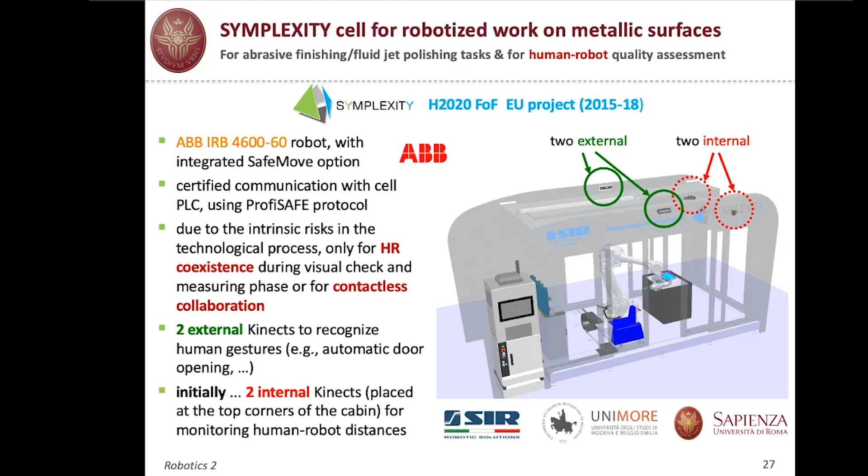You can see the table in the 3D representation here. On the table is the part being manufactured or surface finished. So you could be far from the table with your legs, but in fact inclined with your trunk and arms extended so that you're very close to the table where the robot is moving its device. So you see that you should be very conservative when using the scanners, while the Kinect, as we have seen, can measure distance very accurately in 3D and let you get closer in a reliable way.

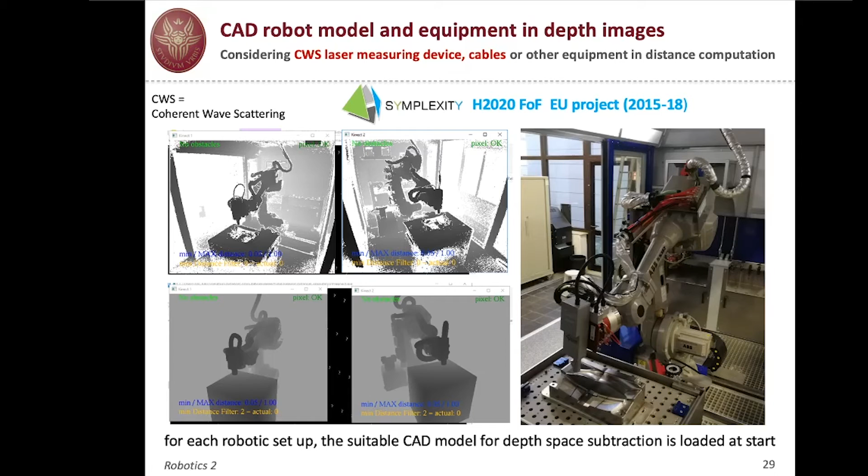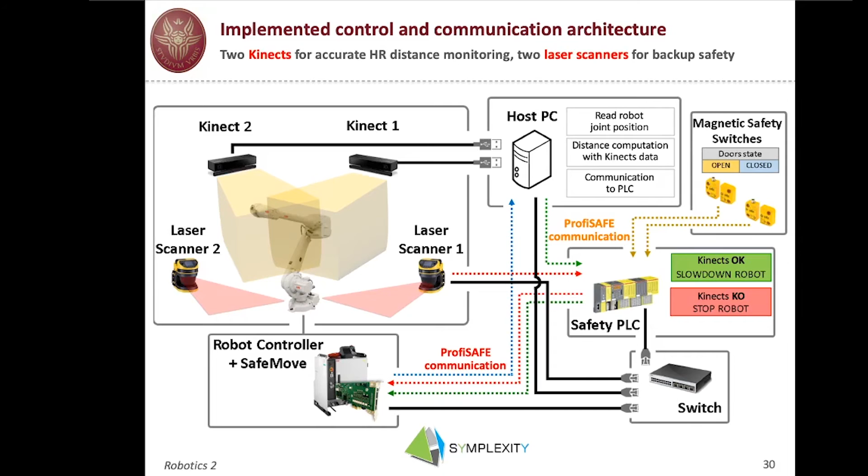There are other switches, for instance on the door state, and everything communicates - the orchestration of all events is done by a safety PLC. If the Kinects are okay and the information is good, but you get too close, then you slow down the robot. If the Kinects are not working properly and the laser scanners detect that the human is not far from the robot, then you stop the robot. So you have a green light and a red light for this.

Here I have a video. This is Andrea Carlesimo, a master's student who did his thesis within this project. He's showing what happens when the robot moves at maximum speed of 10 centimeters per second - it's a very massive one. You can see how it goes inside the cell and what happens to the two Kinect images monitoring the cell on the right hand side. In this case, the Kinects are okay, except when one is obstructed on purpose to show that the second one can recover information anyway.

You don't see the noise, but you see that Andrea is putting a hand in the vicinity - now the robot stops completely. And you see that you can move relatively fast. The idea is not that the robot is doing a dangerous operation like drilling, but it's carrying the measuring device. Now you've seen he obscured one of the cameras, so he's moving the measuring device.

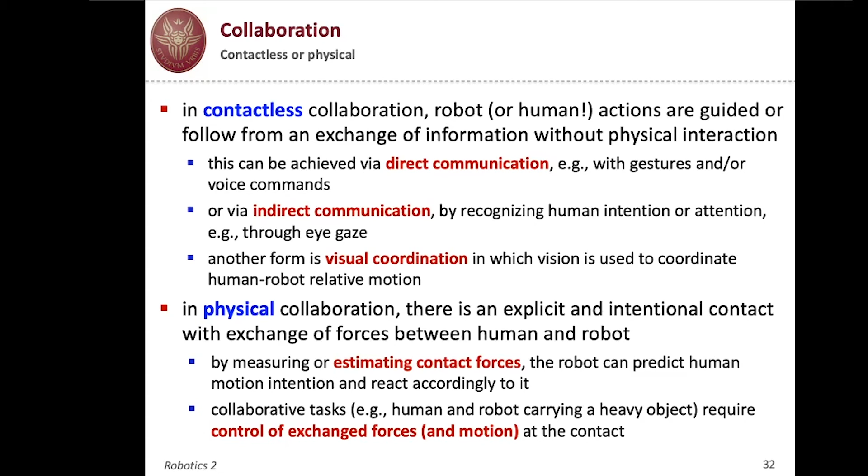Okay, so this as a premise. Now let's say a few words and give some simple examples of contactless collaboration. First of all, you can use your hands, your head, your whole body, different body parts to make gestures. The Kinect itself is able to recognize hand waving, which is the most simple operation.

This is already inside the software of the Kinect, together with the creation of a skeleton of the human body, so that you can follow it. Since the Kinect was used for video games, it can reconstruct the skeleton of up to 4 or 5 persons in version 2 of the Kinect. Together with this recognition comes also the recognition of some simple gestures by hands.

But indeed, you can set up a vocabulary of gestures, and it is important to recognize this in order for the robot to make the associated operation.

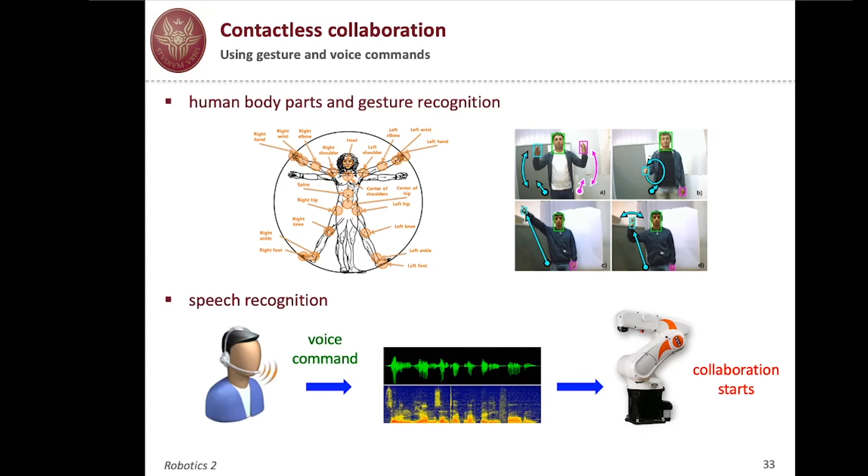Or you can give a voice command. There are very good freeware speech recognizers. So you recognize the voice command, and then the robot will start the collaboration and do something without contact, but collaborating with the human. In fact, you can do both things together - you can show the robot something, do a gesture, while commanding something. So this mixed operation is very interesting.

And here is an old video, one of the first videos we had, where we were using Kinect and the SDK library for voice recognition. So in combination, the robot will move according to the voice command of the human, and the gesture that the human is doing. Here again, there will be some audio in this video, so I have to switch operation.

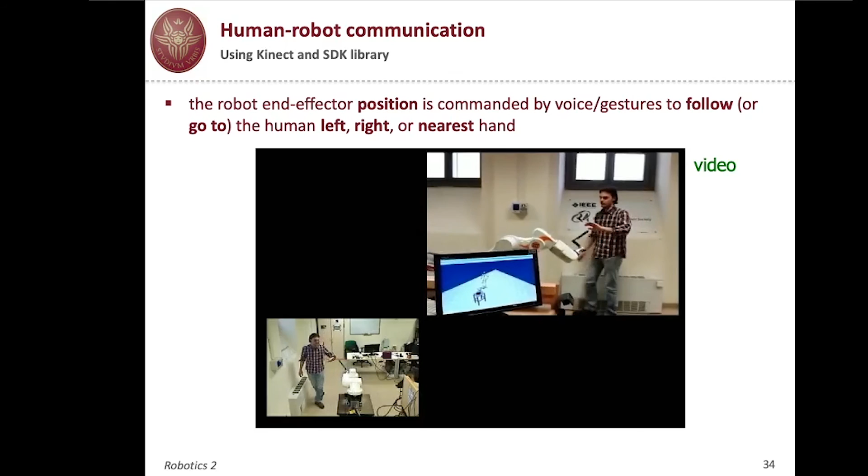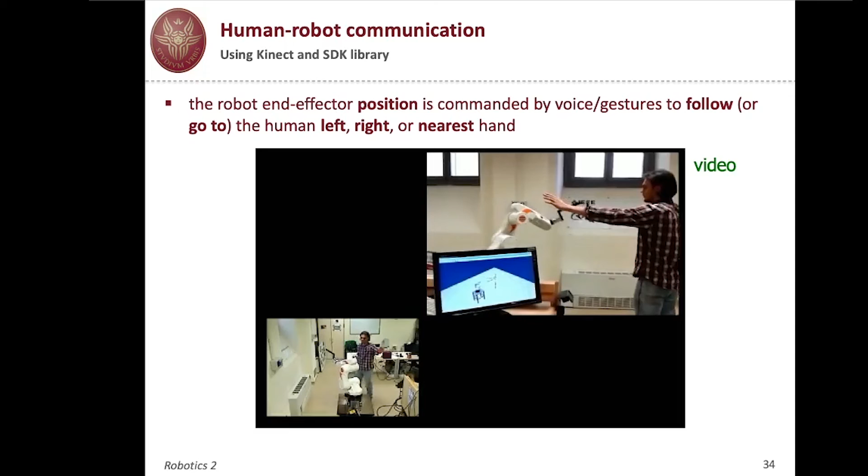KUKA, listen to me. Give me. Thank you. Follow nearest hand. Thank you. KUKA, stop collaboration.

Okay, so you have seen this type of following, motion following. With different commands, the robot goes to where Emanuele here had put the hand, so this is a go-to, or just follow the right hand, the left hand. You just saw a selection of commands. The most interesting one is follow the nearest hand, the nearest as seen by the Kinect.

Here in the video, you see two pictures. One is on the side to show the operation, while the picture on the bottom part is the view of the Kinect, which was overlooking the scene from the back of the robot. So we mounted this L-shaped end effector to show better the orientation of the end effector. It is controlled in position only, so there is some redundancy for this. Following means that the nearest hand is the nearest hand to the Kinect.

So during the video, you have seen that Emanuele exchanged his hand, so the robot had a change of direction and then started to follow the nearest hand to the Kinect - okay, not the nearest hand to the robot. So this was for clarification.

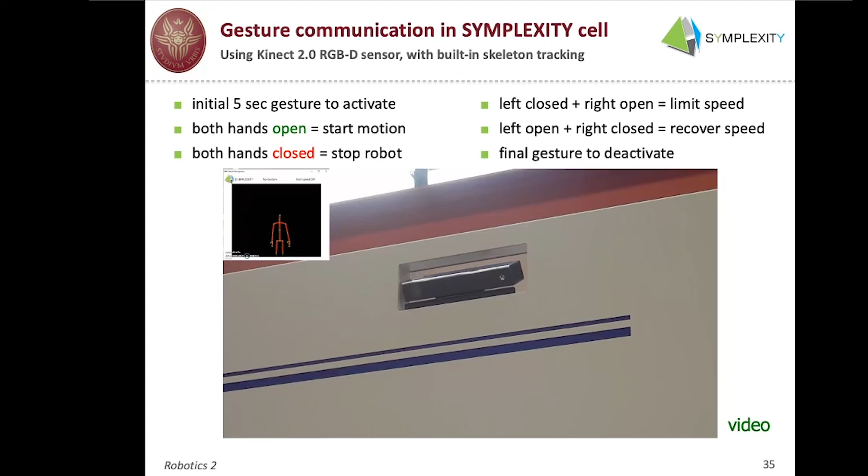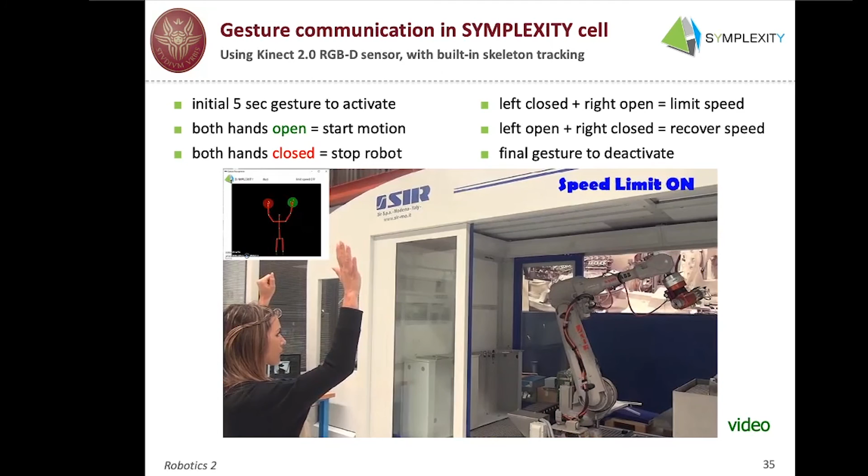So the gestures have been activated now, and now you see both hands are closed or open, and the robot starts motion or stops motion or limits the speed. Again, one open, one closed. The limit speed has been taken out, and the robot has restarted moving. It's a very short video, but just to give an idea what can be done from the outside to the inside of the robot.

Another possibility of communication and programming, if you wish, or modifying online the programming of the robot. Now, I mentioned visual coordination as another possibility of contactless collaboration. We've developed in our lab two types of possible visual coordination. Either you have a camera mounted on the end effector, an eye-in-hand, which follows a human, for instance the human head or face, keeping it always inside the line of sight, or vice versa, a human has a camera or Kinect on his head, on his helmet, or, as we are doing right now, using an Oculus, and from there it provides relative information with respect to the end effector of the robot, which follows the human head. So the robot has relative pointing and relative positioning at the same time.